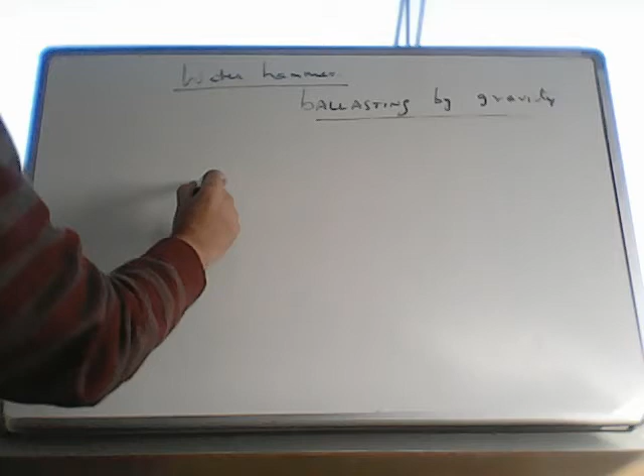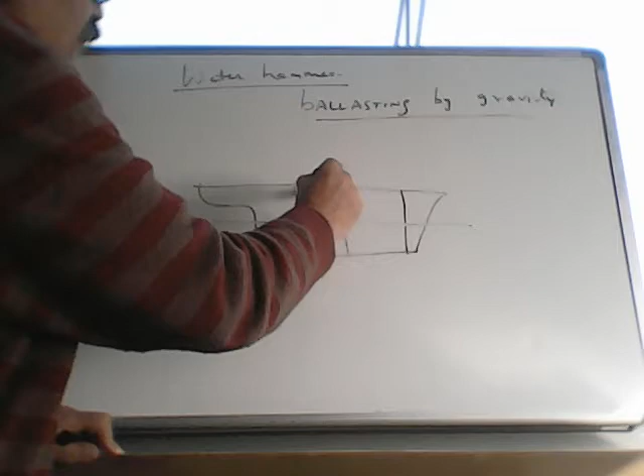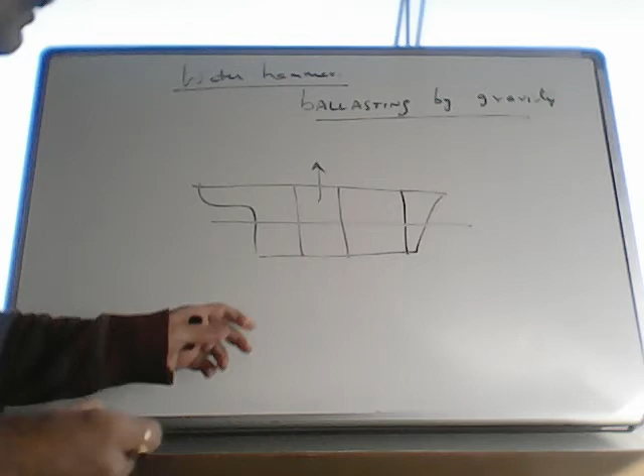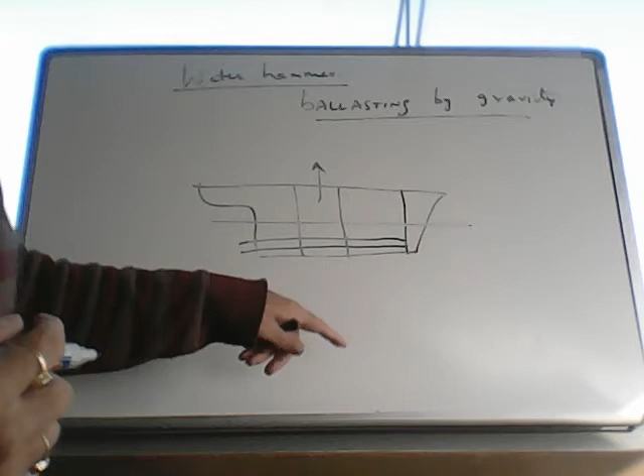Let's say the ship has loaded cargo and come to a port. Now as the cargo is being discharged, you will start taking ballast. Assume all your ballast tanks are empty, because when you started loading the cargo, you were deballasting, so all your tanks became empty, including the ballast pipeline. This is your ballast pipeline. Now you came to the discharge port, commence discharging cargo. Now you have to take ballast. Initially, you normally take ballast by gravity. All tanks are empty, including your ballast pipeline is also empty.

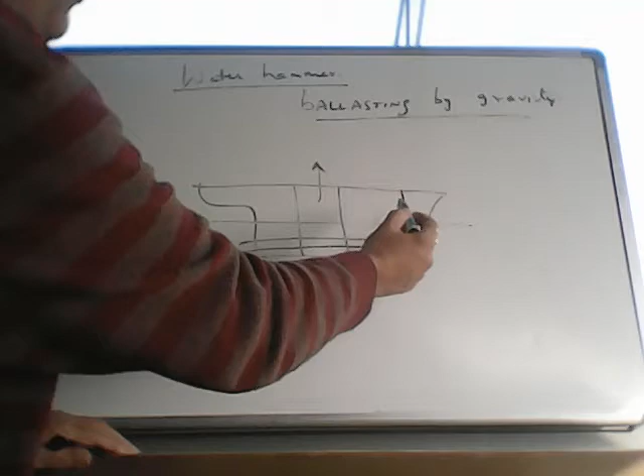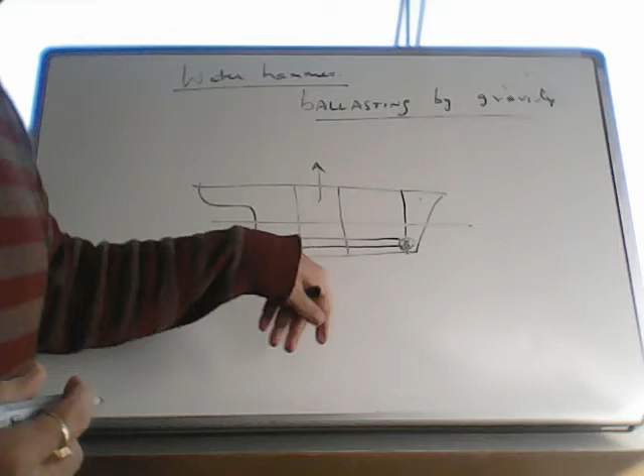Suppose you want to ballast the fore peak tank by gravity. So you have to open two valves - one is the tank valve, this one, and one is the sea inlet valve in the engine room. So which valve will you open first? Now let's say you open this valve first, the sea inlet valve. Now the water will start going inside the pipeline.

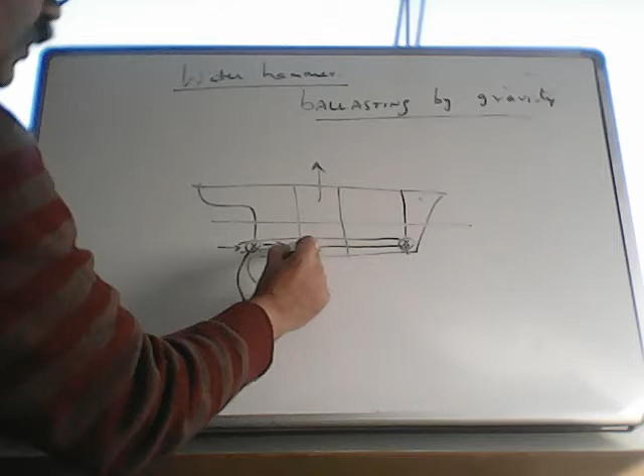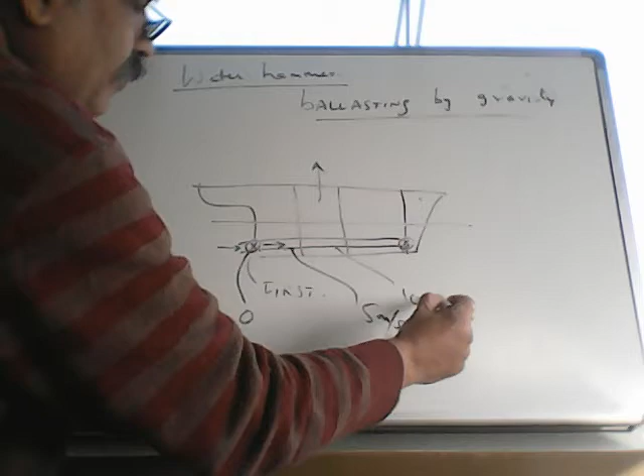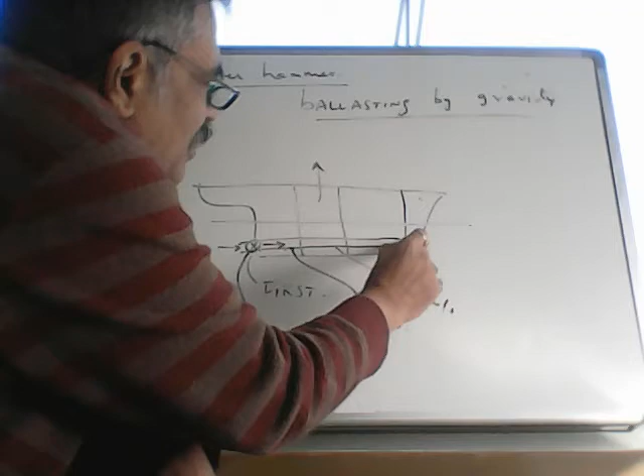Initially the speed of water will be 0, but after a few meters, every 1 second, it will start increasing. Here it would be, let's say, 5 meters per second. Here it was 0, then 10, and then 20 - starts increasing. So you have opened this valve first. This valve is shut. So this high speed of water will strike this valve and possibly create damage to the valve.

So this is called water hammer. We know a steel hammer, which is the normal hammer, and this hammer is caused by water, so it is called water hammer.

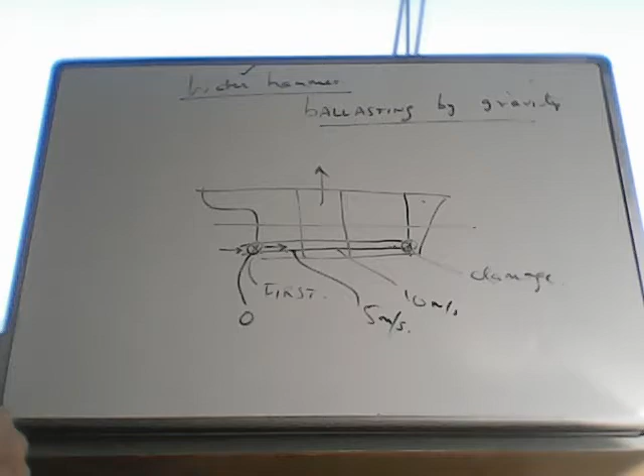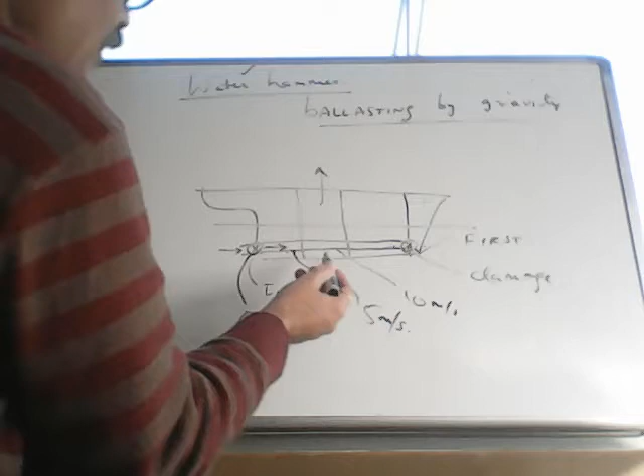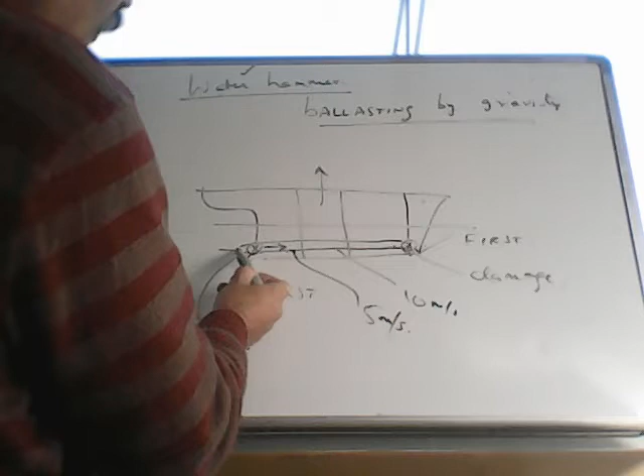Therefore, when you are ballasting by gravity, in this case, you have to first open the tank valve and then you have to open the sea valve. If you do it like this, water will start entering at 0 speed, then speed keeps increasing 5, 10, 20 like this, and this valve is already open. You open it first, water will enter the tank.

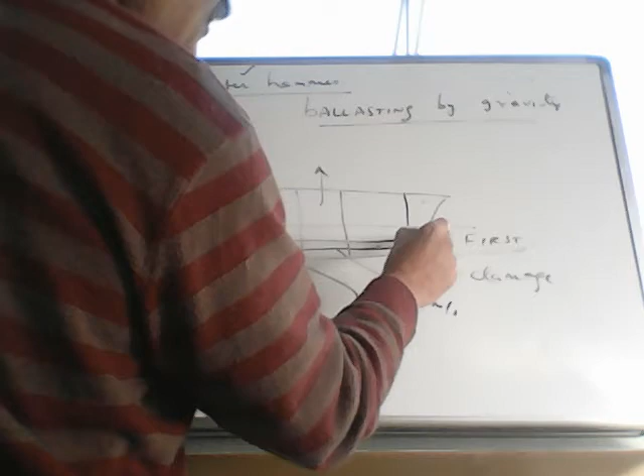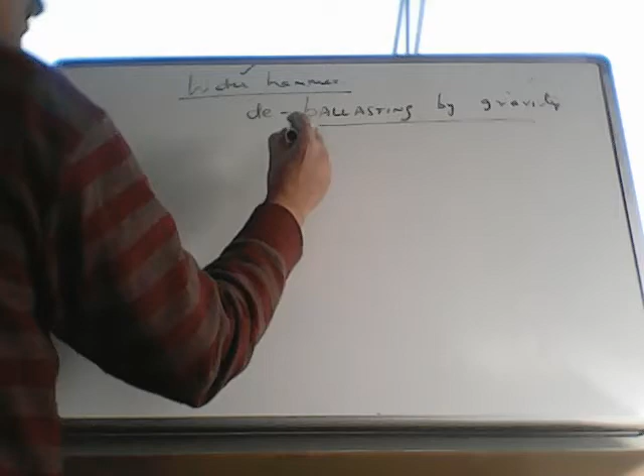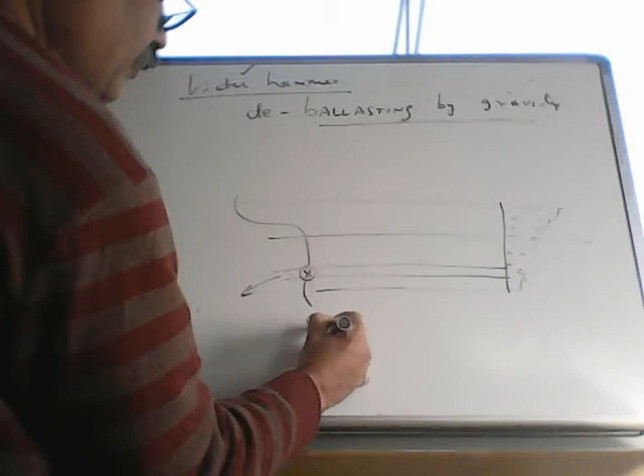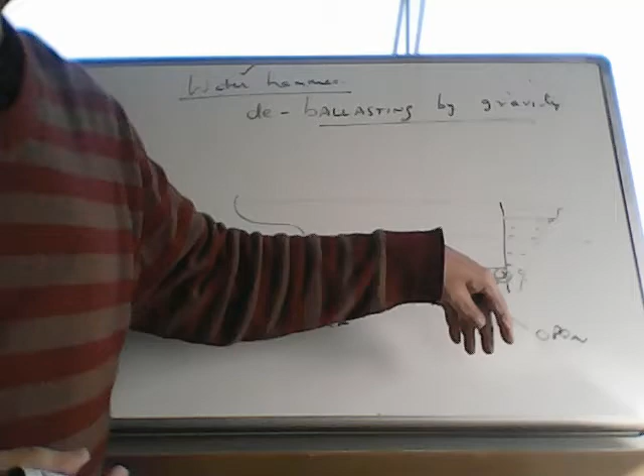So now let's take another case, deballasting by gravity. This is the water line. fore peak tank, assume it is full, and deballasting is going on. So this valve is open, sea outlet valve, and the tank valve is also open. Deballasting is going on. Now after a few minutes, when the water level comes here, you want to stop deballasting due to some reason. So which valve will you close first? Tank valve or the sea valve?

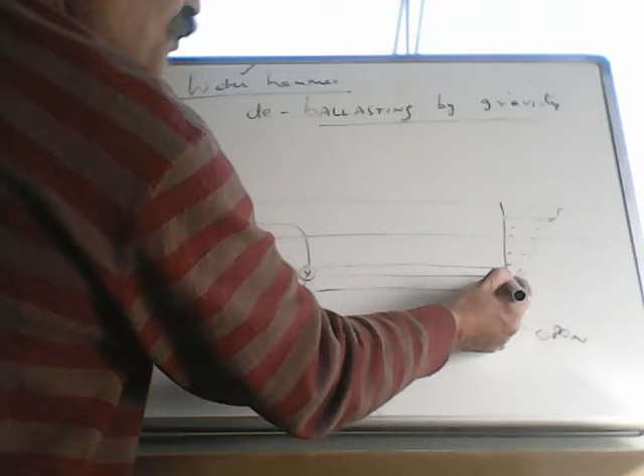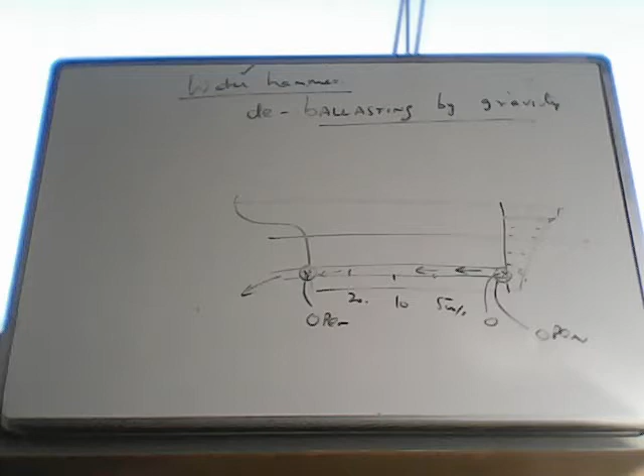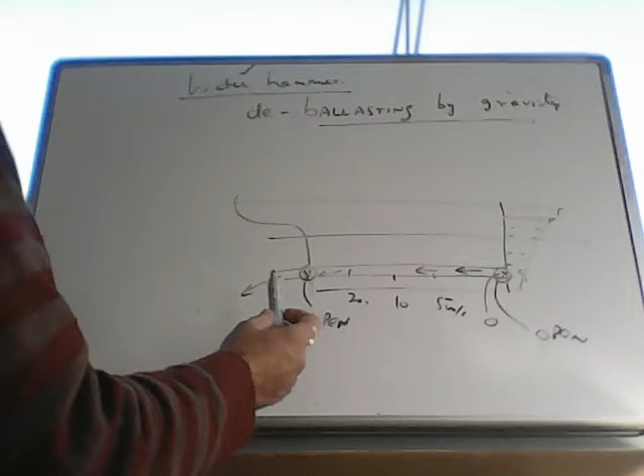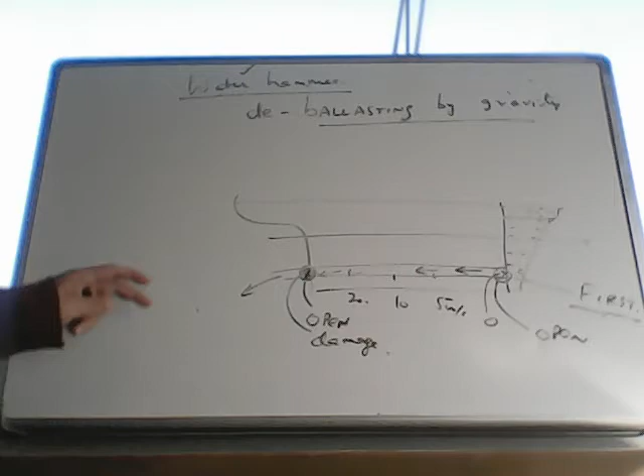Now here again, the water speed here is, water is going like this outside. Initially water speed is 0, then keeps increasing 5 meters per second, 10, 20. So in this case, if you shut this valve first, this high speed of water will strike this valve, the sea valve, and cause damage. So in this case, you have to, now when you want to stop this deballasting by gravity, so which valve to close first? So if we close this valve first, this high speed of water will strike this valve and cause damage. So we must first close the tank valve. So this is deballasting by gravity.

Now let's take one last example. In your house also, when you use the tap, you have a water hammer. Let's see. Now you have an overhead tank in your house. This water hammer is in your house also, and there's a pipe going down, and there's a tank valve here which is normally always open. Now let's say you use the tap here. So tap has got a valve. Let's say wash basin tap, and water is started flowing. So you are washing your hands. Now you want to stop the tap.

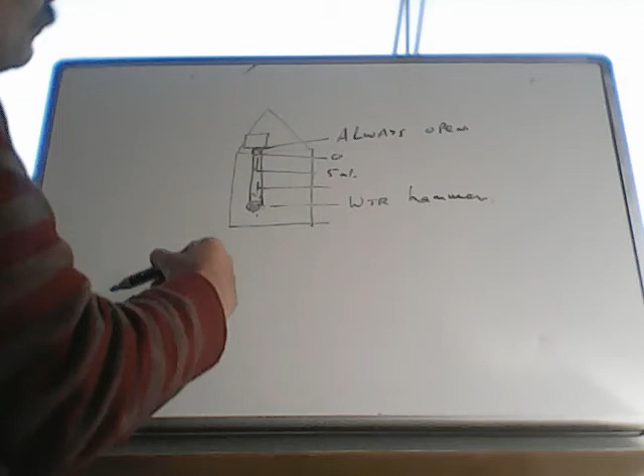So you want to close this valve. Now if you close this valve, you will get the water hammer effect, because the speed of water here was 0, and then it kept increasing 5 meters per second, 10. So in this case, which valve will you close first, the tap valve or the tank valve? Ideally you should close the tank valve first, because here the water speed is 0, but it's not practicable to go up and down. So you can use a second option, second best option, and that is you close the valve slowly. If you close slowly, water hammer will be much less. So this option can be exercised.

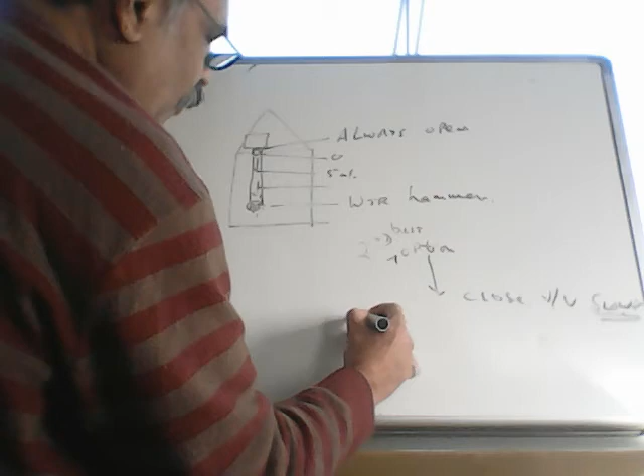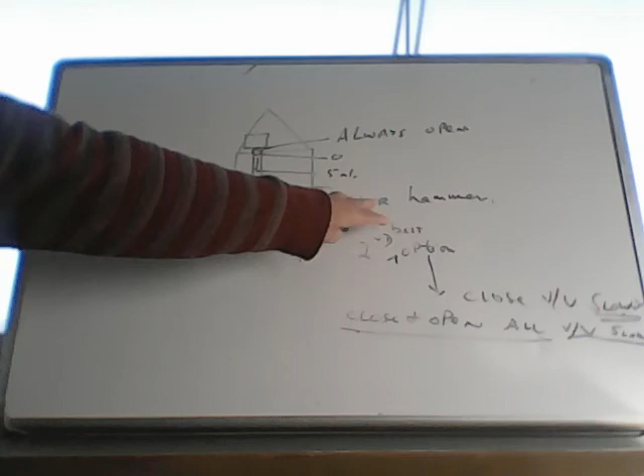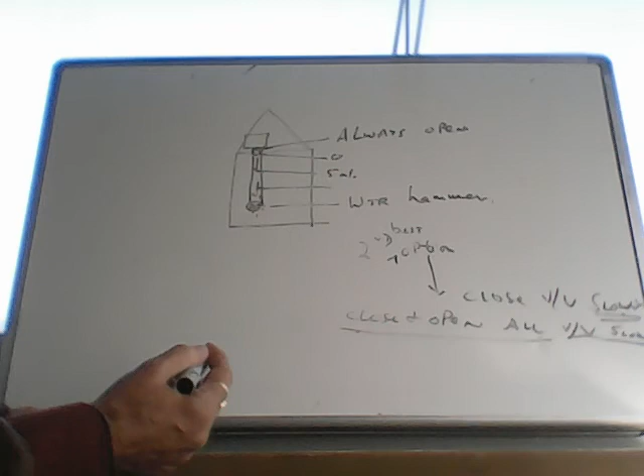So even on ships, it is always better to remember to close and open all valves slowly to reduce water hammer. So this is for manual valves on the ship. If you have a hydraulic valve which you find is closing or opening very fast, so you should adjust that valve to close and open at normal speed or more slow. This can be adjusted by the engineers. The time for the hydraulic valve to open and close, 5 seconds or 10 seconds, will be given in the manual. That is about water hammer.